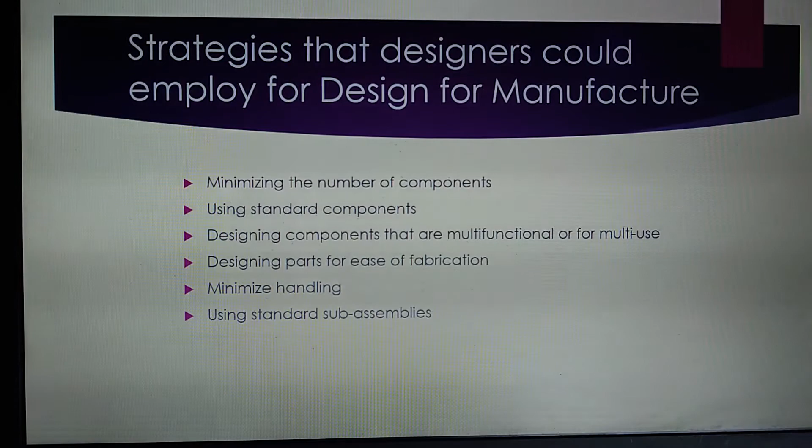And every time you touch something, it adds to the cost of the product. Okay, it also adds to the environmental cost. So financial and environmental costs the more we touch it. So we try to make things as simple as possible that need as little handling as possible. And if we can use standard sub-assembly, so things that are already happening. So can we use this system that we've already got in place to make our products?

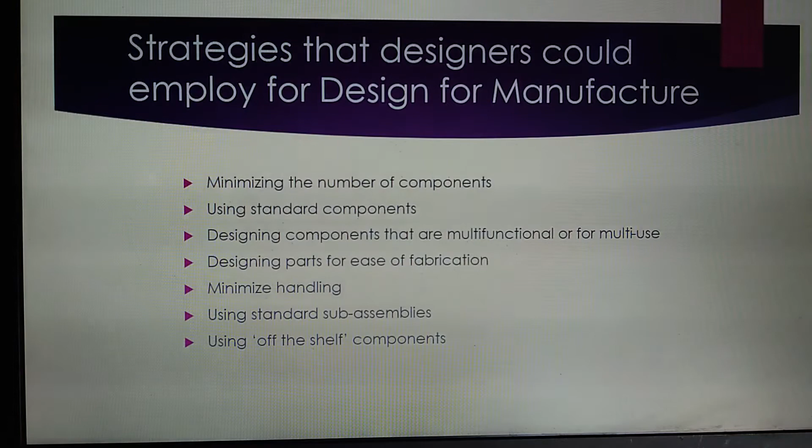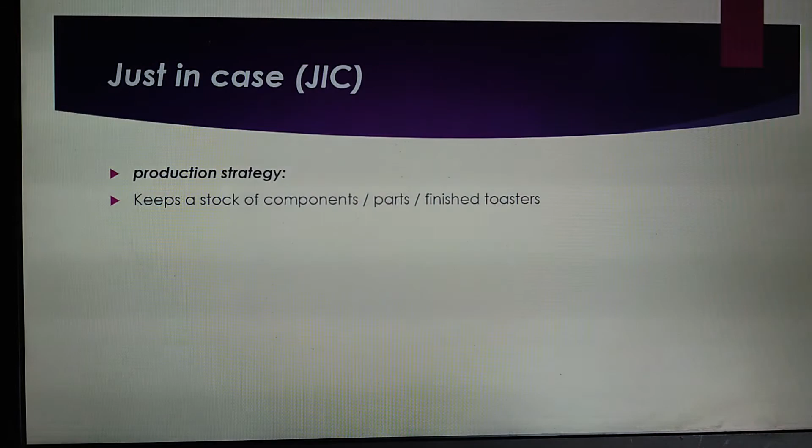And like we were saying earlier about using standard components, can we use off-the-shelf components? So if you're making something, is it possible you can use the Wi-Fi system from somewhere else and you can just attach it? Or can you use the Bluetooth or the volume controllers from somewhere else and just add that into your product? Okay, the less you design, the less you individually need to make, the better it will be for the environment.

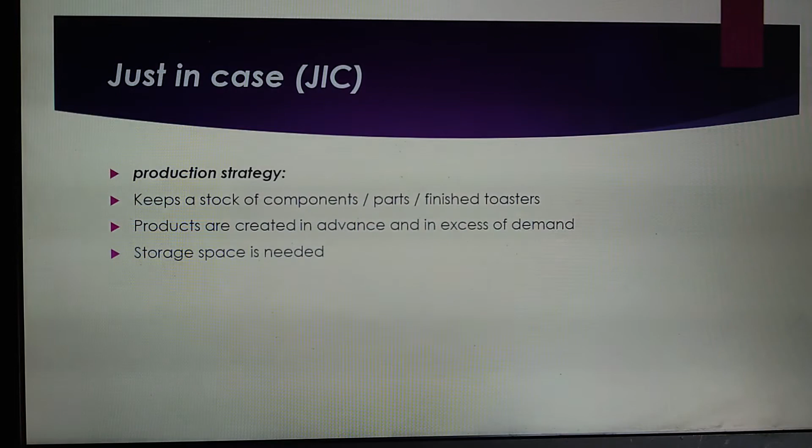Now, when we know we're making it and we've chosen our things, we've got some strategies to choose. There's this one strategy called just in case. Now what this does, it's all about getting a stock of components ready to go. Okay, so we're going to make something and we get a whole stock of components ready, all these parts ready in a warehouse somewhere. So there we go, we've got them ready, we're not sure what demand is, and we obviously need lots of storage space.

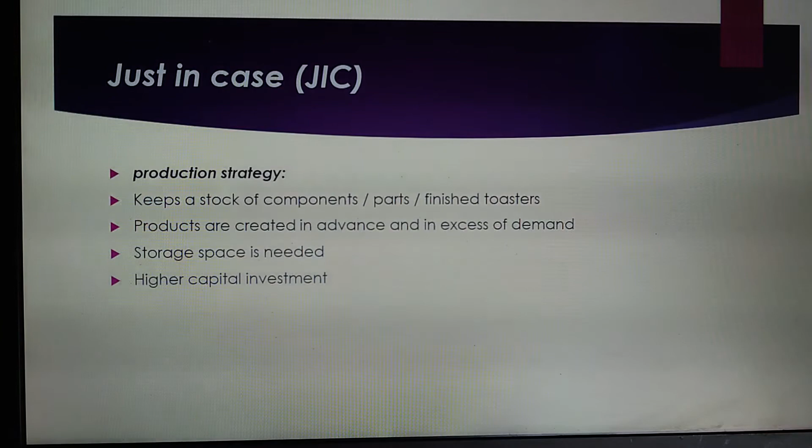And if we need lots of storage space, there's a high capital investment here to buy the parts and store them. And then we can make them when we need to, because we've got all the components. Doesn't matter about anyone else. We've bought them, we've made them, we're ready to go. Oh, we need to assemble something, we can just do that nice and easily.

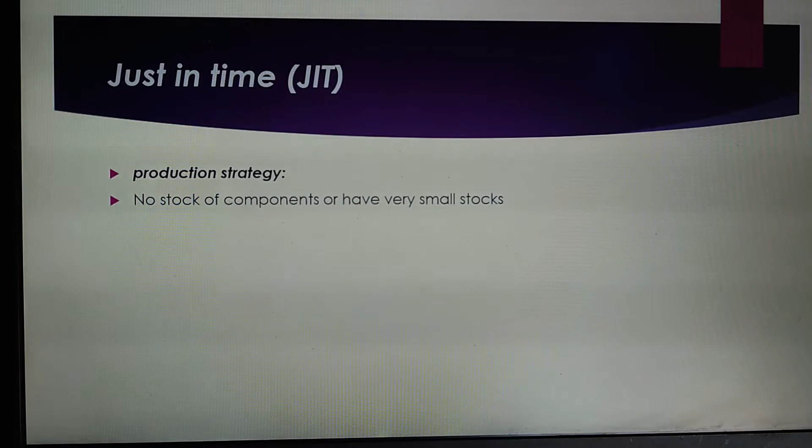Okay. However, what if the market changes? What if suddenly nobody wants our products? Okay, what can we then do? We then need to think about something else. Okay, so we've got lots of components which have got to be used for something else, or we've got lots of wasted products. So we need to think again, a different approach.

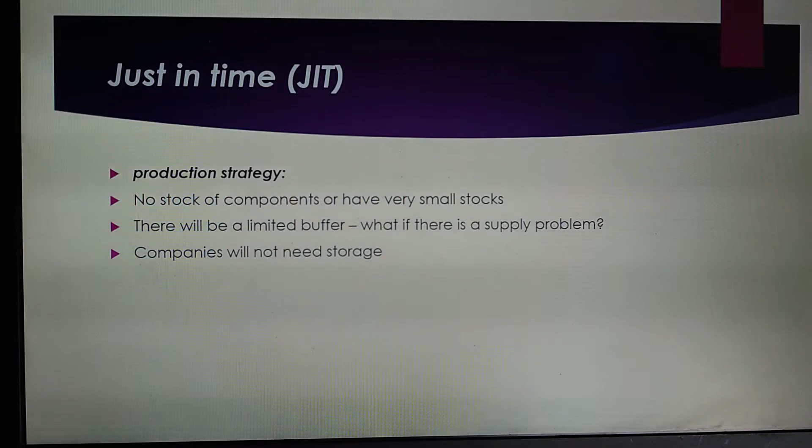Right, this is a different approach, just in time. Now, just in time is a really good strategy. It's got its ups and downs though. Well, the advantage of this one is there's no stock of components. So you have very few spare components.

We're only going to get the components we need. Okay, so we don't really have a stock, we order as we need it. So there's a limited buffer. So if we have a problem with a supply, we then have an issue, okay, because we're relying on only ordering what we need and only using as we need it.

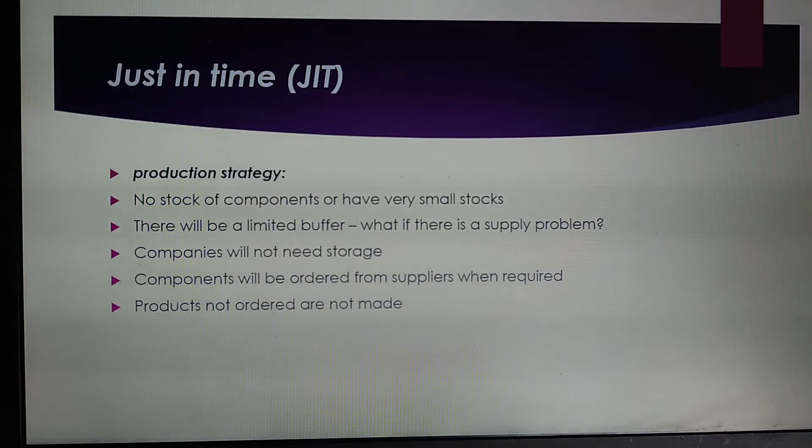Companies don't need storage, so that's clearly better and cheaper, which makes our life a little bit better. And companies will only order what we require. Now, the downside of this is that, thinking from a large commercial point of view, you perhaps don't have the same buying power because you're only buying it as and when you need it, which obviously is different. But it does mean you don't have to have lots of storage. So there's pluses and minuses.

And a supply problem, that can be an issue. With the whole COVID-19 thing, products were slowing down, weren't coming here as quickly from other countries, and that could create problems. But we haven't got any waste of products, so we only made what we need. So if no one orders them, we don't make them.

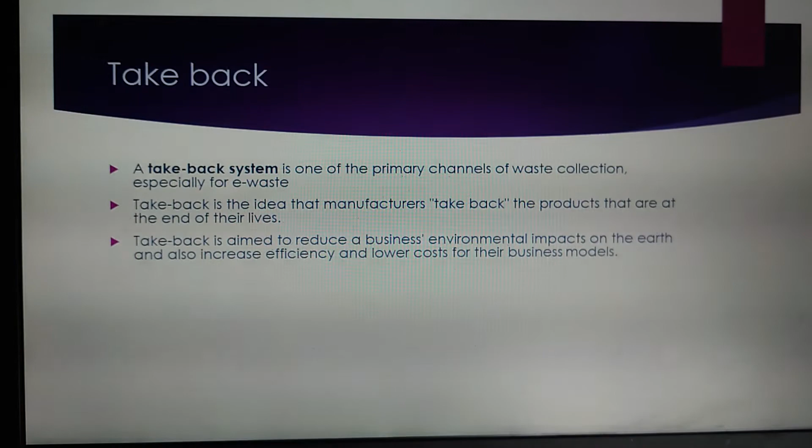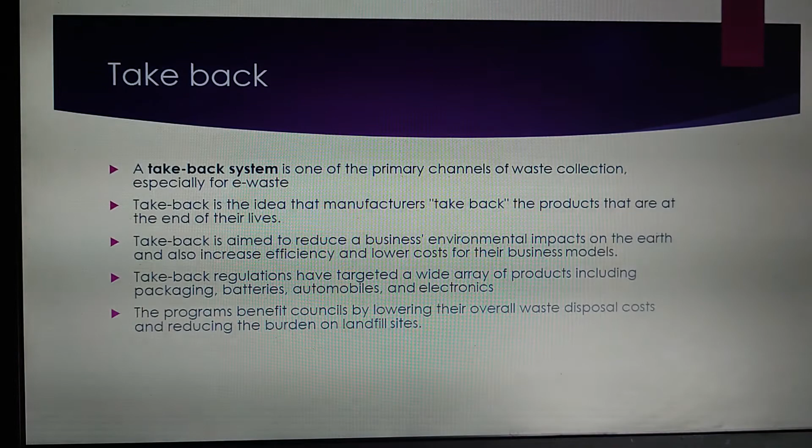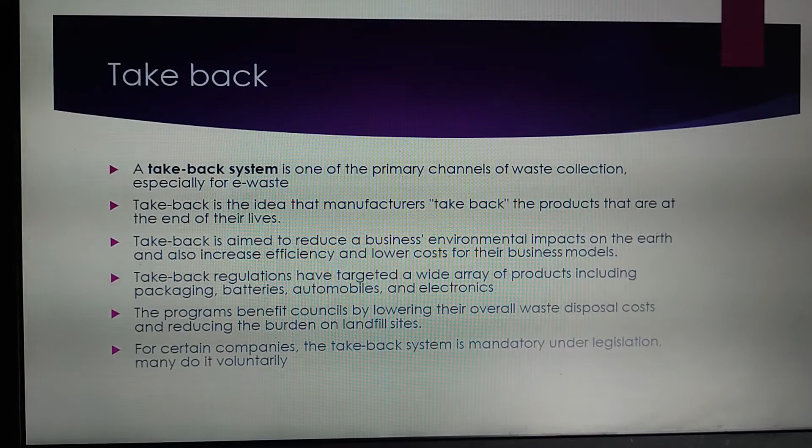So when you get products that are at the end of their life, we can then take them back and they can be used, and that's important. Reduces landfill. It's very much aimed at environmental businesses, to reduce the cost of the business model, because maybe you can then reuse these components in something else. Maybe you can reuse this material. So it's definitely not just for environmental, it actually does reduce the cost for businesses.

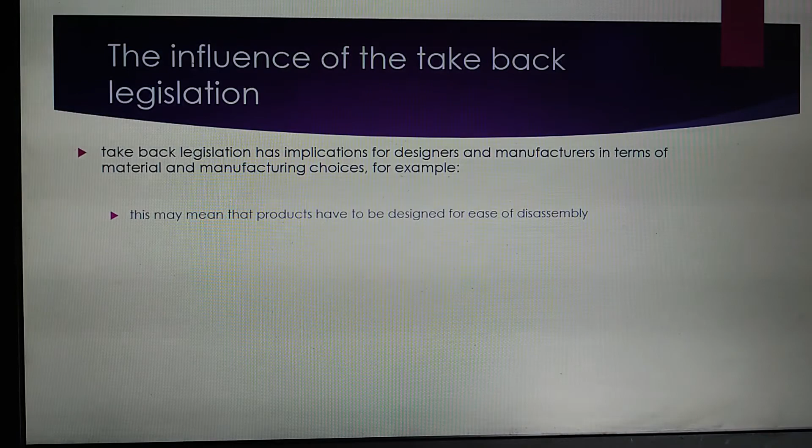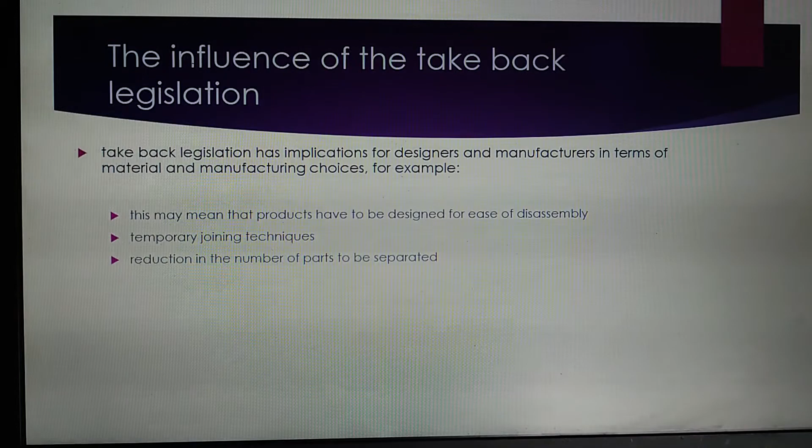Some things, like batteries, there's actually regulations about what has to happen with them, how they can be disposed of. Sometimes it's just cheaper to have a take back thing. So think computers, you can't just put them in landfill, they've got to be disposed of properly, so a take back scheme perhaps helps. Because we're reducing landfill, we're reducing the disposal cost of a product. Some companies have to do it, other companies just do it voluntarily. Some want to do it because it gives them green credentials, and some people have to do it.

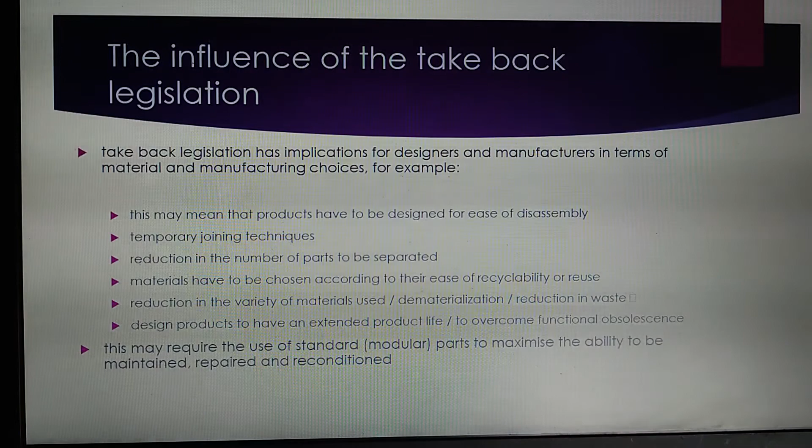Now, the influence of this take back legislation. So what does it do? This means people have to start designing stuff differently. They have to start designing products for disassembly. So if you're going to take it back, can you take it to pieces? They perhaps use temporary joining fixtures so you can get them apart, so you heat it and it comes apart. They will use less parts. Let's make it easier to separate. Let's choose materials which can be recycled or reused. So these are all things that matter if it's going back to the manufacturer.

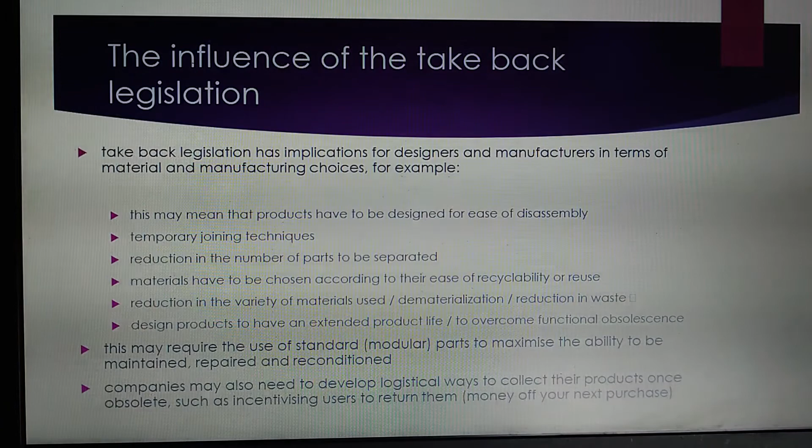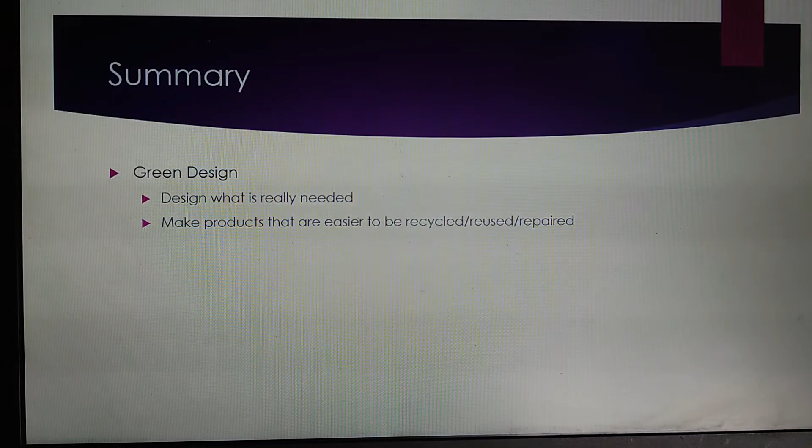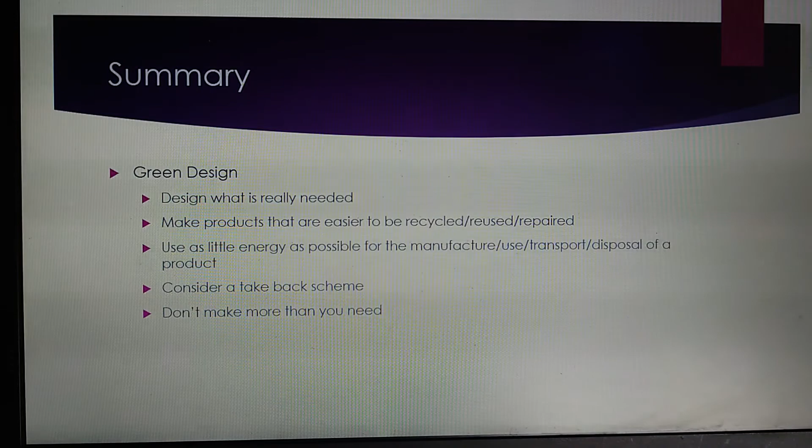And then maybe we use less parts. Do we use less materials just to reduce this waste? This is key. And we're designing products that last longer, so it's less of a burden to take them back. With a take back, can we use standard modules? If you take back a product and you could reuse a whole section of it, that would be even better. That's a good way of doing it. Companies encourage people to take things back, giving incentives to users, maybe money off your next purchase, vouchers, discount codes, access to new equipment.

So in summary, green design. We only design what's really needed. And you make products that are recycled or reused or repaired. Use as little energy as possible, for manufacturing, use, transport, disposal, whatever. Take back scheme, it's a good idea, it's a positive. And don't make more than you need. So that's the whole just-in-time thing. If you don't need it, don't make it, because then it just ends up getting wasted. And we've got to think about how we dispose of products.